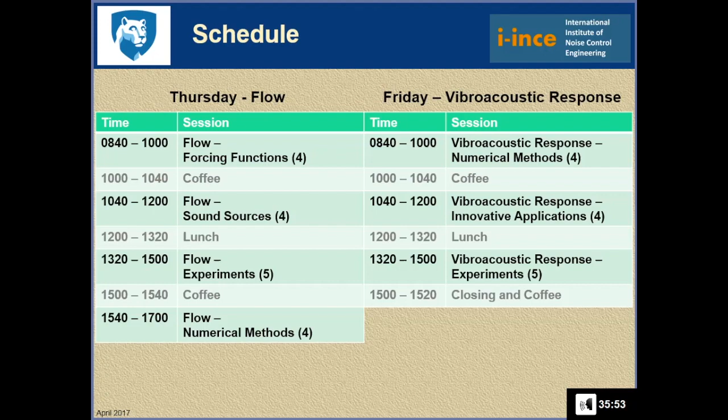What I'm going to do in this talk is go through an overview of the field of flow-induced noise and vibration. Certainly not exhaustive, but hopefully a good overview, drawing from the materials that were presented at the symposium. I've picked some of my favorite slides and put them together in a hopefully cohesive order to explain the field.

So these forcing fields are partially correlated over space, and they're convecting at a certain velocity. And those two aspects are what make these flow-induced forcing functions so interesting, and particularly make it very complicated to determine how well a structure underneath those forces is going to respond.

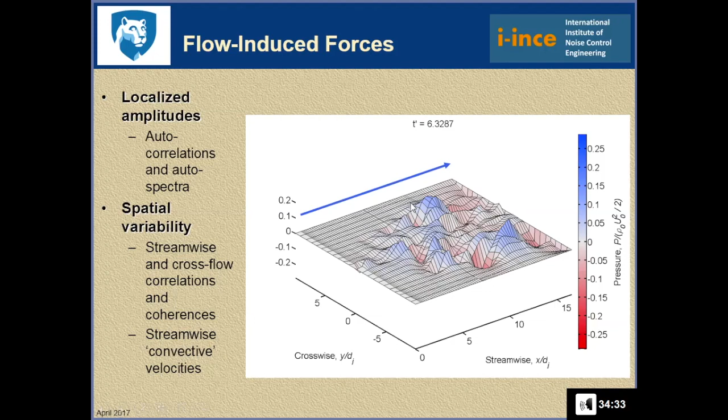So in a moment, I'll go through how these sorts of forcing functions are measured and how they're simulated. And I'll focus on both the autocorrelations and autospectra, that would be, say, a point pressure measurement, and the streamwise and cross-flow correlations and convection velocities.

But first, let's look at a little flow chart of some of the topics that we talked about. And it all starts with turbulent flow.

As I go through these slides, I'm going to have these images, and I'm going to give credit to the author of each one. At the very beginning of the brief, you saw that we had a website, FLINOVIA.org, and on that website you can find zip files of all the presentations and 2-page extended abstracts. So if you want more information, just go grab them and you can read up on it.

Now, what I'm not going to spend a lot of time on, in fact, not at all, is another very important topic, and in fact, a topic that inspired a lot of this work early on in the 1960s and 70s, and that is what happens to the structure when it is excited over a long period of time. And what happens is you get a lot of alternating stresses in the material, and over a long period of time, that material might fatigue, fail, and damage.

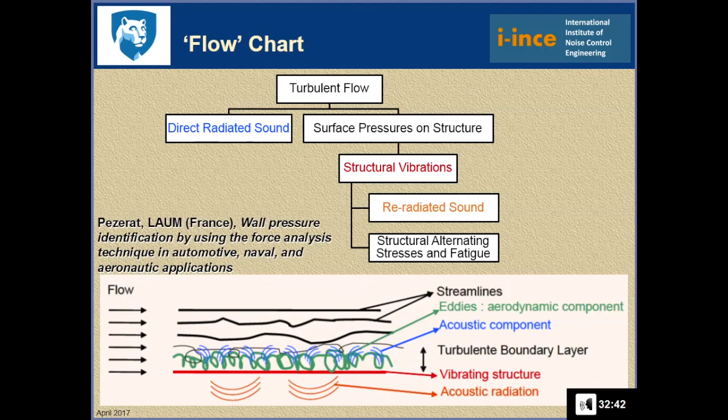If I take those vehicles and take them out of the water and put wheels on them, like for a car or a train, we can speed them up. The drag in the air is much less than that of water. And then if I take these vehicles, take the tires off and put wings on them, then I've got aircraft, like airplanes and launch vehicles. And the speed is much, much higher then.

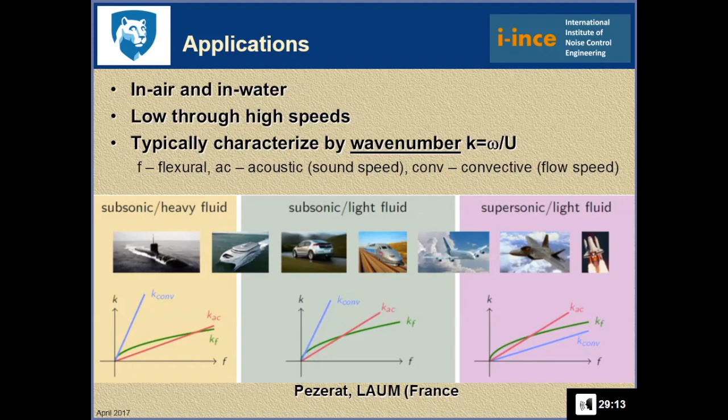So let's go back to the forcing functions and look at both measurements and simulations. I'll start with some measurements, and I'll start with high speed.

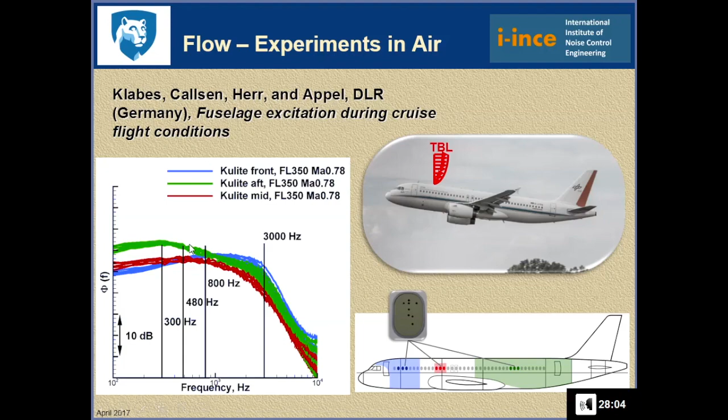And this is a very typical autospectrum. What we have is a low-frequency plateau, a knee, and then at high frequencies, a dramatic reduction in wall pressures. And this is on a log scale, so this is quite a reduction up here at high frequencies. We can also see that the low-frequency pressures tend to grow as the boundary layer gets bigger and propagates downstream. As it gets bigger, the eddies that are turbulent get bigger and contribute more to the low frequencies. This is quite typical of a progressing boundary layer flow.

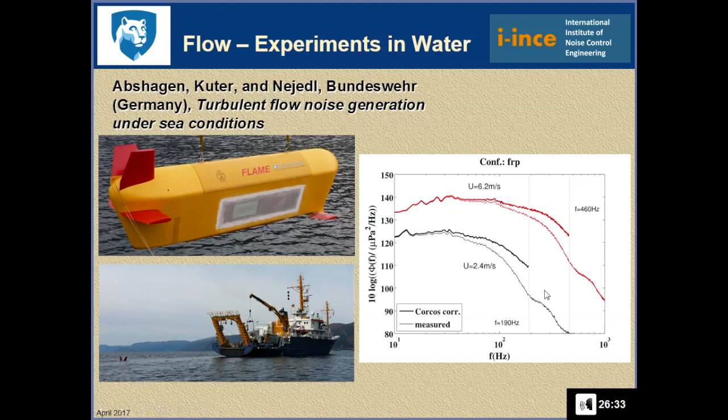So in fact, if you were to plot this on a non-dimensional frequency, which we have not done here, take frequency and divide it by the flow speed, the knees would align at the same Strouhal number. That's what we call the non-dimensional frequency. And if I further scale the amplitudes, I can get these curves to collapse onto a fairly universal curve. The other thing to notice is that these amplitudes are high at much lower frequencies in water, again, because the flow speed is so much smaller. The knees in the curve are at lower frequencies than they are here for the in-air high-speed application.

Now, that's boundary layer flow over long surfaces, like on a vehicle body. But there's another area of interest, which is very important, and that's turbo machines. So we have airfoils over which boundary layers form and grow and generate forcing functions. And for airfoils, we usually care most about what's happening at the trailing edge. So this is just the back half of an airfoil. I've cut off the front part here.

And these are measurements made by Scott Morris at Notre Dame. And this was done using a combination of pressure sensors in the wall. And the colors you're seeing are from an optical measurement technique. And in this case, he's plotting something either vorticity or related to vorticity, where you've got positive and negative vorticity on the top and the bottom. But the point that he makes with this example is how much the wall pressures change as the flow propagates downstream.

At this blue location, we have a wall pressure spectrum that looks a bit like we saw previously. We have a plateau, and he hasn't gone high enough in frequency for us to see the knee and the curve too clearly here. But this is the suction side of the airfoil.

What's happening here as the flow propagates downstream is it's encountering bigger and bigger areas, and this induces something called an adverse pressure gradient. The flow slows down. And when the flow slows down, the eddies get bigger, and the energy all shifts to different frequency ranges. So we have here a slightly increased amplitude. That's because of the pressure gradient, and even more of an increased amplitude here, but a shift downward in frequency as the flow speed decreases.

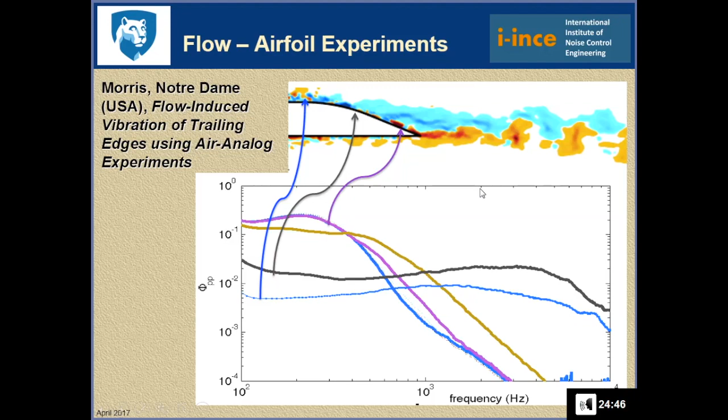So the flow over these edges can be quite different, propagating from front to back.

That's just one part of the problem. That gives us the amplitudes, but we also need to know how correlated the flow is. And we get that from measuring things like cross correlations in time or coherences in frequency. I've got two examples of that here.

Continuing with the work by Morris at Notre Dame, he's got an array of pressure transducers, streamwise and cross-stream. I believe this plot is of the cross-stream measurements. And what you're seeing here is the coherence as a function of separation distance. So as the pressure sensors are separated by wider and wider amounts, the correlation gets smaller and smaller.

Not labeled here, but also included, are sets of data for different flow speeds. And as the flow speed increases, the correlation also increases. So you can integrate this and come up with something called an integral length scale, essentially the rough size of the net pressure forcing function on the surface.

Over on the right is more data from the towed underwater vehicle from Abshagen. This is looking at the frequency dependence of the coherence. This shows what I was trying to explain, that as the flow increases in speed, the coherence increases as well, not only over space, but in this case, over frequency. So that's another part of the forcing function that we need to solve for either radiated noise or structural response.

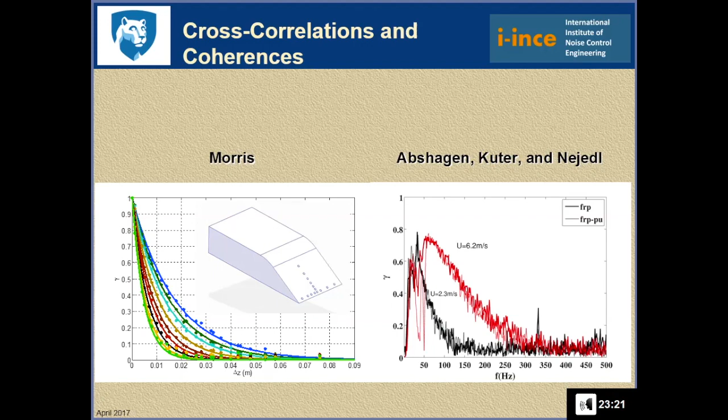Now, it's actually, I think, in some cases easier to measure forcing functions than it is to predict them. And predictions have been around for a long time, back in the 1960s, again, mostly motivated by aerospace industry concerns. A lot of measurements were made, and empirical forcing functions were postulated assuming certain functional forms, like exponential decays over space and oscillations in the convection direction, where you could take these empirical models and plug in things like boundary layer thickness, flow speed, some other parameters, and generate an approximate forcing function and correlations as well.

More recently, we've decided that's not good enough, and two other approaches have emerged. One is these empirical models have been augmented, more variables added. And when I say augmented, I mean augmented by other computations, such as computational fluid dynamics, Reynolds averaged Navier-Stokes models. I've got an example of that from Croaker from University of New South Wales in Australia, where he's got an airfoil and a flow profile from a RANS solution.

Now, what RANS gives you is a couple of things. It'll give you a mean flow distribution. That means you can get all of the flow gradients and the Reynolds stresses. But it also gives you a piece of the unsteadiness, and that piece is going to be the RMS intensity, how strong the turbulence is, and it gives you a length scale, which you can then use to estimate the integral length scale. And those two components, plugged into some of these expanded empirical models, will do a pretty nice job of generating a forcing function for you.

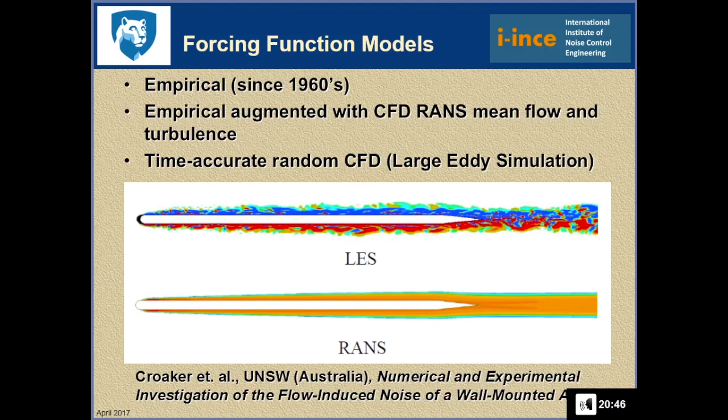Now that's a 2D example. Computers have gotten so powerful that people have gotten even more ambitious and are solving incredibly complicated problems now.

Here's another example from Croaker on the left, where he has a strut mounted into a wall. We're looking at three different kinds of turbulence here. We have the boundary layer forming over the surface, and as it propagates downstream, it gets stronger and stronger in intensity, so you can see the turbulence here.

That'll excite the trailing edge, also radiate sound. Up at the tip, we have tip vortices forming along the edges. This is the kind of thing you might see in aircraft wings without winglets. And at the bottom, we have a boundary layer coming in and generating junction vortices along the root.

At the top and the bottom, these different forcing phenomena mix with each other to make things even more complicated and difficult. But if you have a time-accurate solution, in theory, you can compute all of the forcing functions together and the resulting noise and structural excitation. Now this is self-generated turbulence.

On the right is an example from Wang and his students at Notre Dame, looking at turbulence ingestion. That's another very important topic in flow noise. What this is: if the flow coming into the structure is turbulent, then as the blades rotate past the turbulence, more unsteady forces and noise is generated.

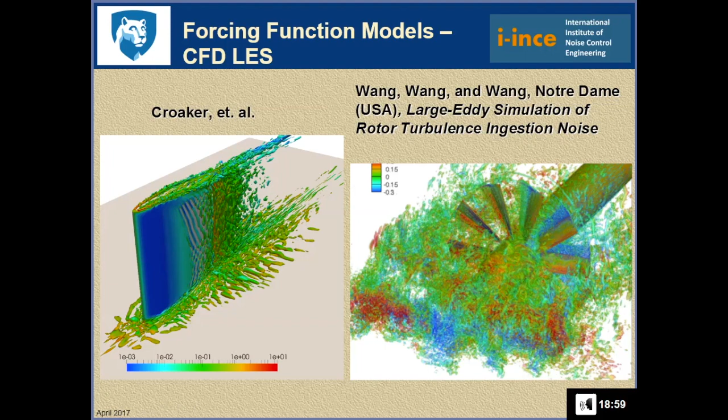As you can see, the data from these calculations becomes extremely complicated. It's very hard to post-process. In some cases, the post-processing is just as difficult as the actual simulation itself. But the attraction is that everything is there, in theory, but with a limitation. I'll show you that limitation shortly.

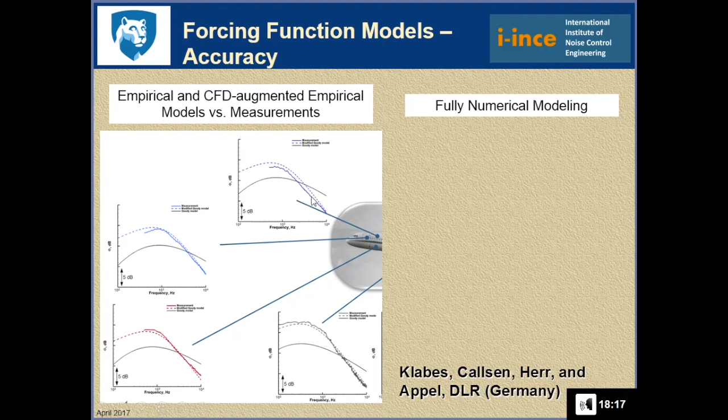Now this isn't exactly LES, but here's a full numerical attempt at computing the wall pressure forcing functions at one location. And here we can see the good and the bad of LES. Again, I'm not sure this is exactly LES, but I'm going to use this as an LES example.

And that is this: at low frequencies, the large eddies are modeled, and large eddies are what cause the low frequency noise. But all of those models have a cutoff—they're only good up to a certain frequency at which the eddies become too small to model, and they're no longer modeled. What happens then is, of course, you're not capturing all of the energy.

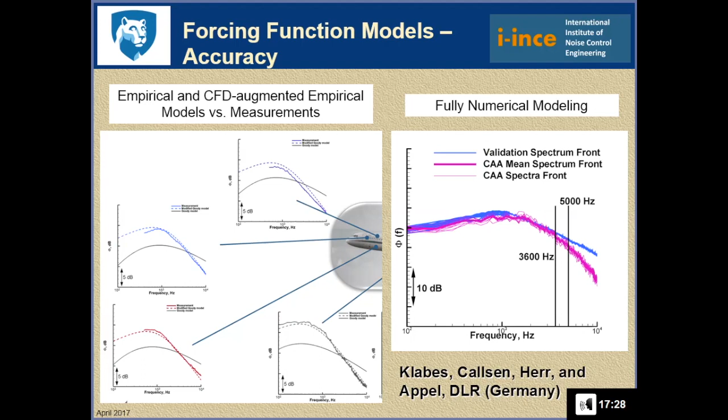Now this can be improved, but what that means is smaller and smaller grids, bigger and bigger models, longer computing times, bigger file storage, and all of that. So there are limitations to these LES models.

So we've got some idea of what the forcing functions look like, either through measurements or simulations. How about looking at the kind of sound they radiate?

Here's an example of some measurements made by Devenport and his team at Virginia Tech, where they've taken a spinning rotor and put it in a wind tunnel. They've aimed two types of turbulence at it.

Up at the top, we have sort of a jet flow impinging upon the top part of the rotor. So as the blades spin by that jet, they're, number one, excited by the non-uniform flow. That'll generate some vane passing tones. But also the turbulence will cause randomness and widen the noise about those tones.

On the bottom, they've got a wall boundary layer where the blades are spinning past the boundary layer. The same sort of thing happens, but the turbulent boundary layer sources are different.

There are two clever contour plots of radiated sound measured at these pressure locations by these microphones. On the x-axis is frequency. On the y is something called the advance coefficient—that's the axial flow speed divided by the rotation speed of the rotor and the diameter of the rotor. So in this case, as J increases, RPM is going down, and the vane passing frequencies are going down.

These dashed lines indicate the vane passing frequencies. Red indicates a lot of noise, blue indicates very little. If we just had no turbulence in the flow, but just a mean flow difference around the circumference as the rotor spins past it, you would see nearly constant red lines along these vane passing frequencies. But since we have random turbulence, it alternately slows the flow down or speeds it up, and that generates a random, almost Gaussian function about these blade passing frequencies.

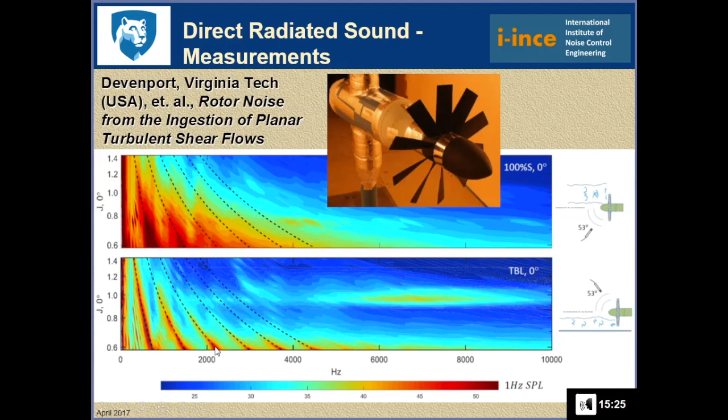How do we model this sound? There are different ways of doing it. The most rigorous way is to include the acoustic wave equation along with the Navier-Stokes equation. That's difficult.

Instead, what is probably most common is something called a hybrid method, where CFD is used, large eddy simulation or something similar, and the aero and hydrodynamic pressures are captured along with the velocities. Then a post-processing step is used where those CFD solutions are plugged into an acoustic analogy approach, something like those developed by Lighthill, Curle, or Ffowcs Williams and Hawkings many years ago.

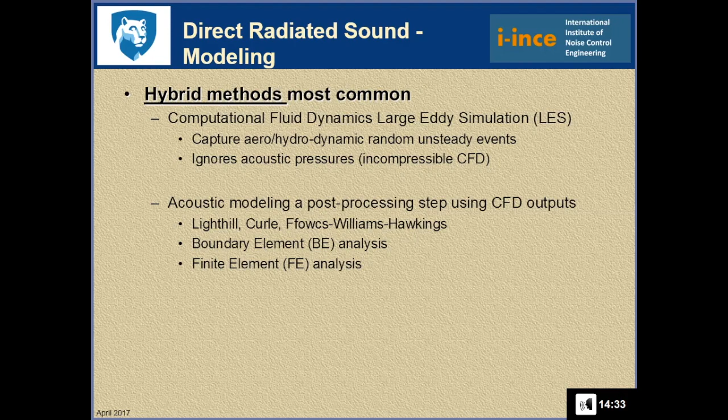That works quite well for free field radiation, but if you've got an obstruction between the source and your receiver, such as a duct around a jet engine, it's more appropriate to use a numerical method like boundary element or finite element analysis. Here's an example from DLR.

This is looking at a centrifugal turbomachine, a compressor. In this example, CFD was used to solve for the flow in the passage here and in the discharge region. Then that flow solution was taken and post-processed with an acoustic model of the discharge region and the discharge ducting. So all of the pressure contours you're seeing here are acoustic, positive and negative.

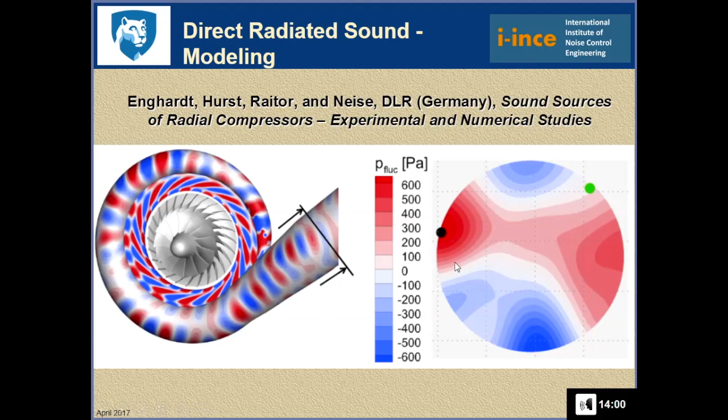You can see the wavelengths in the duct direction, as well as wavelengths across the duct at this slice that they've computed.

So that's forcing functions, direct radiated sound. Let's talk about the fun part, and that's structural response calculations. These are even more difficult.

Once you have the forcing function, you can do a couple of different things. If you're lucky and the structural motion is small and does not influence the flow field itself, you can use something called a blocked approach. That means the forcing functions from your flow solution can simply be applied to a structural model, and you don't have to worry about the interaction between the two.

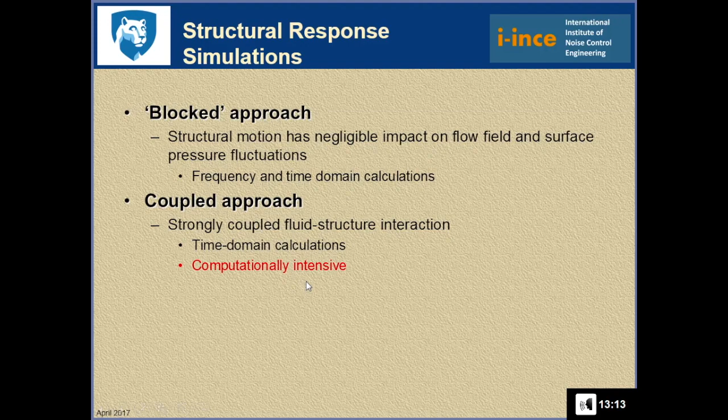If you're not so lucky and the structural motion is large and affects the flow solution, then you have a strongly coupled fluid structure interaction problem. That means both solutions have to be coupled together, and this gets even more computationally intensive. I'll show you examples of that shortly.

This is not from FLINOVIA, but from a paper I did at the NOVEM conference in 2005. This shows an example of a flow field around a propeller, a pressure distribution that varies over space and time. Here's a little notional example of what that pressure distribution might look like in the flow direction and the cross flow direction.

I'm not going to go through the equations here, but I will talk about the bottom one. This is the classic frequency domain blocked forcing function structural response calculation approach, where we have a triple matrix multiply. The Gpp here is the cross-spectral density matrix of the pressure distribution. This includes the amplitudes, the cross correlations or coherences, and the convection if it exists. The H's are simple structural acoustic response functions, easily generated from analytical solutions, finite element models, even measurements.

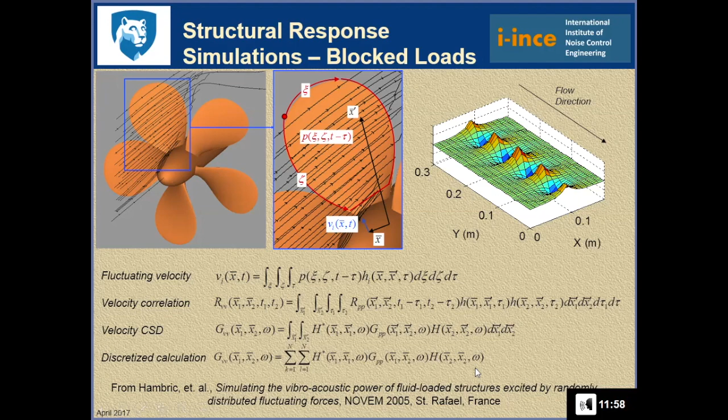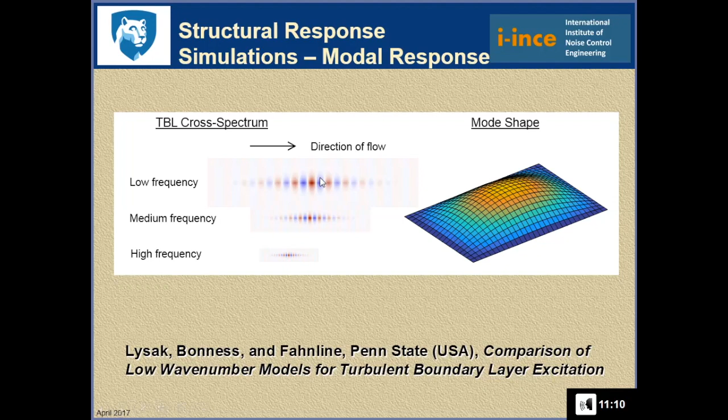And that's what makes this coupling problem so complicated, is that the structure is responding to very, very small effective pressure distributions.

Now, the frequency domain approach works fine if you have stationary and ergodic forcing functions. If you don't, if your forcing functions are more complicated than that and have strange variations over time, then you have to go to a time domain approach.

This is the nozzle example I showed earlier, except now looking at the nozzle. This is some work we did for Pratt & Whitney. We have a converging nozzle, and the flow discharges here and then suddenly diffuses. In this example, we're adding another complication: this is supersonic discharge flow.

The little light lines you're seeing in this surface contour are shock cells. The turbulence propagates past the shock cells and shakes this entire field around, causing an extremely complicated forcing function that really doesn't look a whole lot like the models you would get for a turbulent boundary layer.

And in the bottom is an example of the structural response. The nozzle is on the left, and then the end of the plate is over here on the right. We've got free ends on the left and the right, and then clamped ends along the edges.

If you've got a really good memory, or if you're watching this online, you can go back to the forcing function animation and notice that the pressures in the forcing function were much higher wave number, more waves over that distance than the structural response function is showing you here. This is illustrative of the structural filtering. We're getting low wave number structural response to a forcing function field that's dominated by high wave number excitation.

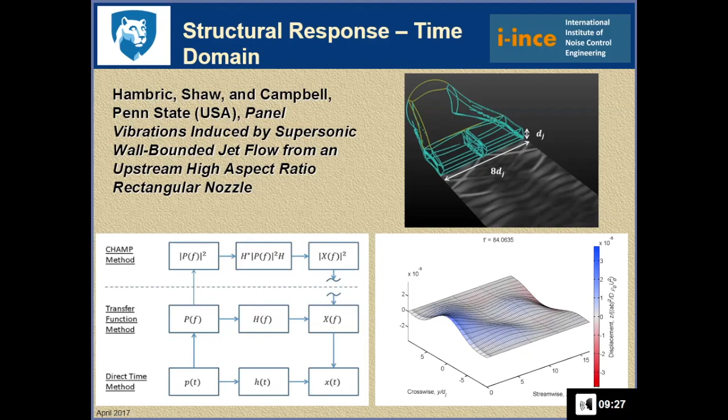So that's an example of how to compute a structural response. Now, the big question that all my sponsors ask me is, how accurate are all these approaches? There's a lot of different pieces going into this calculation. And the answer is, okay.

Here is an example of probably the best agreeing response we could find. And all investigators do this. When they put together their papers, they find the example where the simulations agree best with the experiments. And we're no exception. At first glance, if you look at these comparisons, you think, boy, that's very nice agreement.

We have non-dimensional frequency here. This is Strouhal number, and a non-dimensional displacement here. But if you look closely, you can see problems. Here's a mode that's not captured well at all. Here's some more.

There are uncertainties and biases in everything we do. No forcing function is perfect, no structural model is perfect, and that leads to these differences.

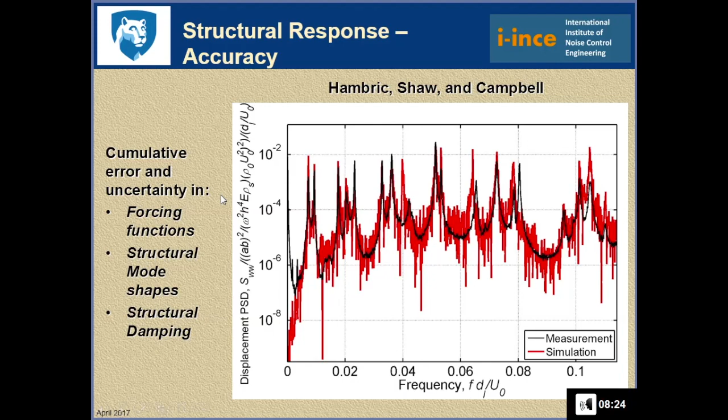In this example, the edge boundary conditions, the measurement, they were bolted into a wall. And you might think that's an easy thing to model, but it's not. There's big differences in structural damping, differences in where the modes occur. The forcing functions are certainly not properly 100% captured by LES. There's always differences.

More on that in a moment. But first, one more method of computing the response of a structure to a turbulent flow. This is a similitude scaling-based approach being looked at by several people at Sherbrooke in Canada and Naples in Italy, along with INSEAN in Italy.

And the supposition is this: if you can take a structure and put it in an appropriate flow-induced forcing function field and measure its response, and if you've got another structure that is perhaps bigger, smaller, different thickness, different material properties, the flow field is perhaps faster, slower—if they're similar, you can perhaps use scaling laws to simulate the response of this other structure in this other flow field.

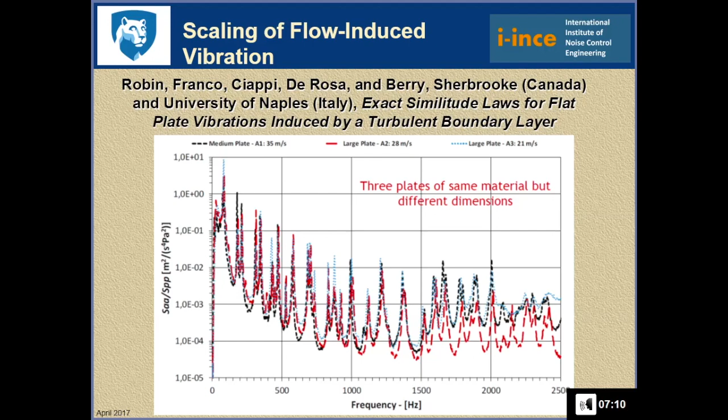And that's what they're illustrating here. They've taken different plates and different flow conditions and shown that you can, in some cases, collapse those responses. So that's a very clever way of simulating the response of something else. Perhaps a sponsor asks you to change the design of something—it's got the same shape, but a different material. You can use these scaling laws to quickly estimate the response.

All right, let's get back to accuracy. This is a couple of great slides by Paul Bremner. He looked at some old data measured on a launch vehicle by Allan Piersol, one of the founding fathers of random analysis response. This is looking at the variation of vibration on a launch vehicle at several locations.

So he has a mean. And over on the right, Paul has computed a relative variance, okay? That's this dashed line here. So that's the variance of the response. What he's doing here is trying to tell you what components contribute most to the variance, essentially to the uncertainty. And he's got a bunch of pieces here.

The first is just the frequency bandwidth. That's well known—let's not focus on that so much. But the others are uncertainty in the forcing function, uncertainty in the mean structural response, and uncertainty in the damping. And he's got a frequency-dependent set of individual uncertainties here.

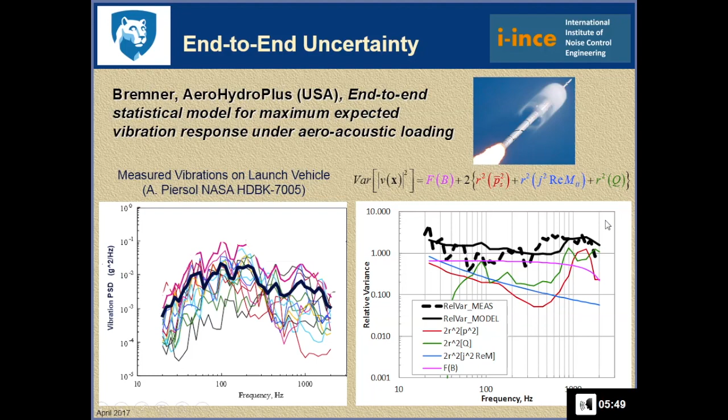What we can see is at low frequencies, all of these are fairly important. But at high frequencies, it's pretty much uncertainties in the forcing function and uncertainties in the structural damping that are most important to pursue. So this is kind of a pointer to the research that needs to be done in the future to improve our accuracy at higher frequencies.

So I've gone through the overall procedure for measuring or simulating flow-induced vibration and sound. If we have a high vibration level or sound level, what can we do about it? We had a couple of papers at FLINOVIA that talked about that.

The first is looking at how to reduce jet noise, by Morris and McLaughlin at Penn State. What we have is a supersonic jet discharging from a nozzle. There's a lot of that work done at Penn State. What we're showing here are different pressure measurements as a function of non-dimensional frequency and the angle off of the jet flow direction.

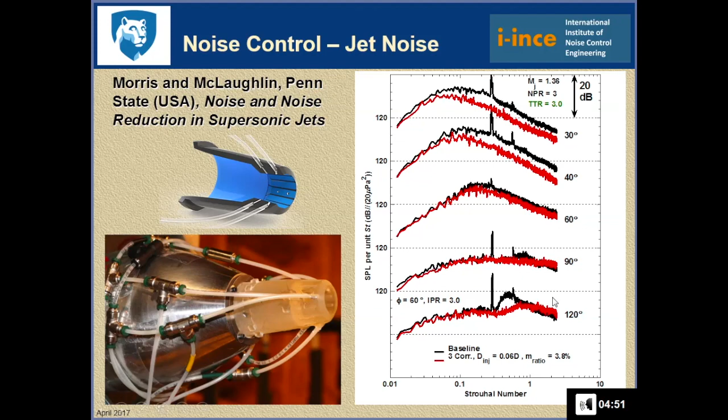What they're doing here is injecting a small amount of flow right upstream of the discharge. When you do that, you break up the strength of the turbulence, break up the coherence of the turbulence, and at certain flow angles can reduce the broadband sound. This is ongoing work as they try to improve this to other angles as well.

Our friends at CIRA in Italy, the Aerospace Center in Italy, have been looking at flapped wings and the sound that comes during landing. So we've got flow over a wing and a pretty ugly flow downstream around the flap during the landing process, and that generates a lot of sound at the surface. This is a numerical simulation of an attempt to put in a perforated liner to try to reduce the sound that reflects off of that surface and propagates down to the ground.

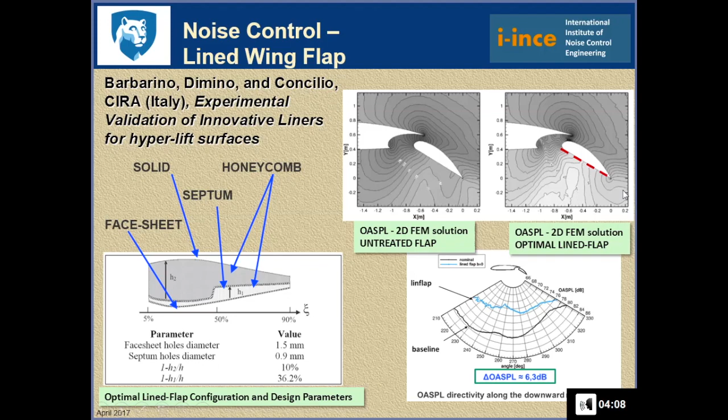This is the angular distribution of the sound reductions that they predicted with their models, and they have ongoing measurements to try to see if they can capture the same reductions.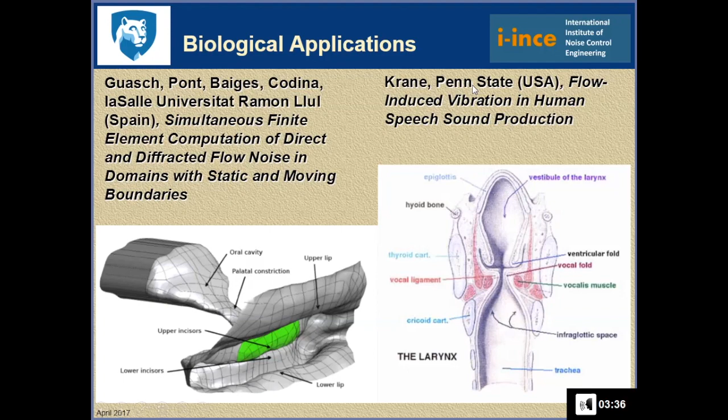Here is an example of an extremely complicated fluid structure interaction problem, and this is modeling the sound that I am making right now. We are combining the structural vibration of my larynx with the acoustics inside the duct or cavity inside my larynx, as well as the flow that I am generating as I speak. This is some work done by Oriol Guasch from Spain and by Mike Krane at Penn State.

Here's a couple of snapshots of some of Oriol's work, and these are extremely time intensive. We can only generate a few milliseconds of this, but this is a human mouth. Here's the top of the mouth, here's the bottom of the mouth, here's the larynx. What he's trying to simulate is the noise that you make when you do a sibilant S.

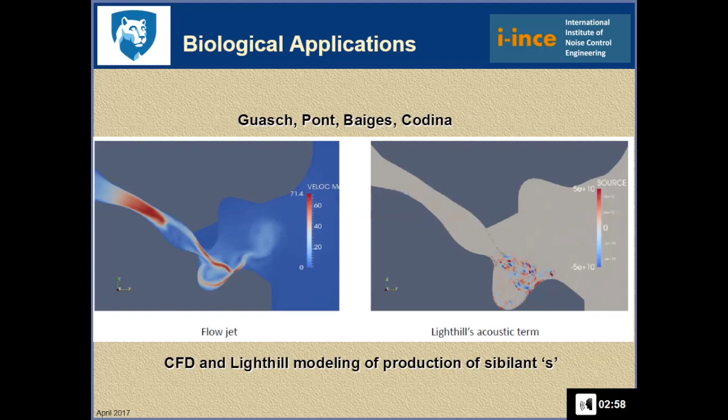So here's his flow simulation, solved with a CFD solution, time accurate. And he plugs that into a Lighthill acoustic analogy to generate the sound field. I'm summing up in a very simple slide what it took him months to calculate. So if you want more information, please go to the FLINOVIA site and download it.

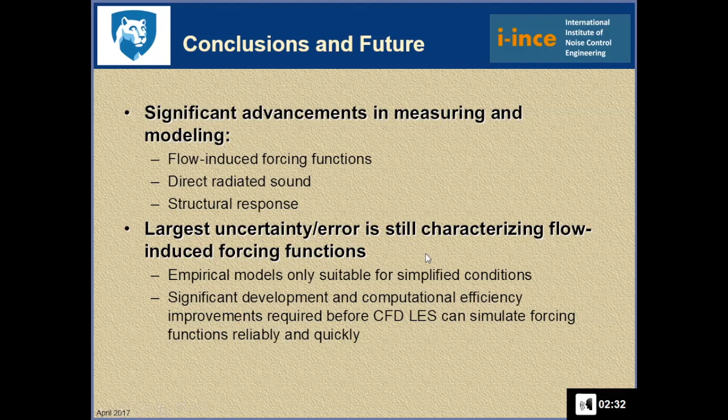I think the FLINOVIA Symposium was a great success, and it really highlighted almost the full breadth of flow-induced vibration and sound work that's going on. I know it's not everything, but I think it was a pretty good representation. There have, of course, been significant advances in everything I've been showing you. But there's still a lot of uncertainty and error, and I still point to the flow-induced forcing functions, along with structural damping, as probably the two biggest areas we need advances in for the future.

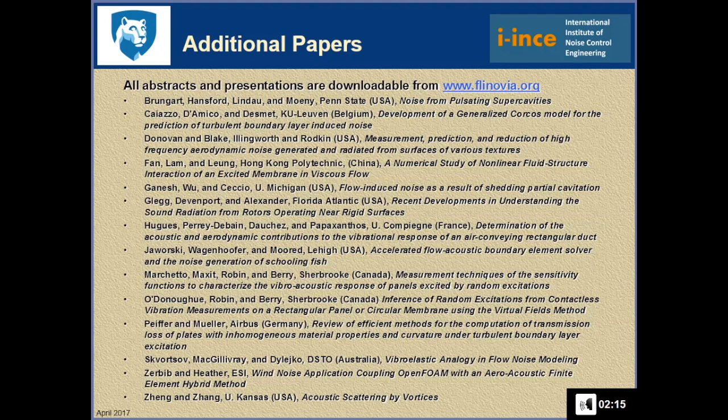Sadly, I was not able to include examples from everyone's papers, so here are the others that were equally as good, but just didn't quite fit into the overview I was doing. So once again, FLINOVIA.org will give you access to all of it. And there's more detail coming in a book to be published by Springer.

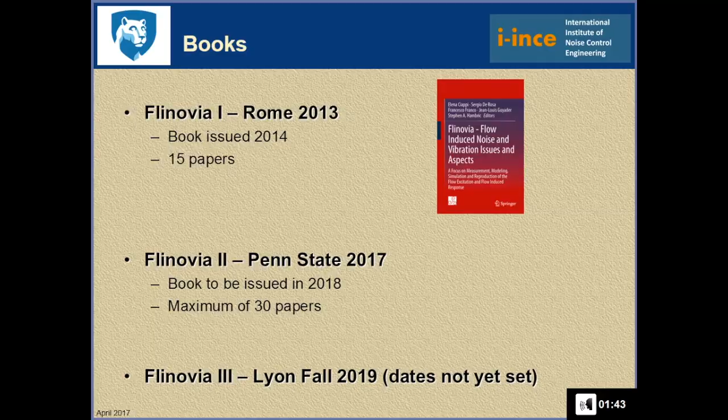The intent of the FLINOVIA workshops is to first present and then document. The first book from the Rome proceedings is available now. It had 15 papers. I'm pleased to report that the second one was twice as big, so we'll have a maximum of 30 papers coming out in 2018. And I'm pleased to announce that our colleagues in France have agreed to host FLINOVIA III in Lyon in fall 2019.